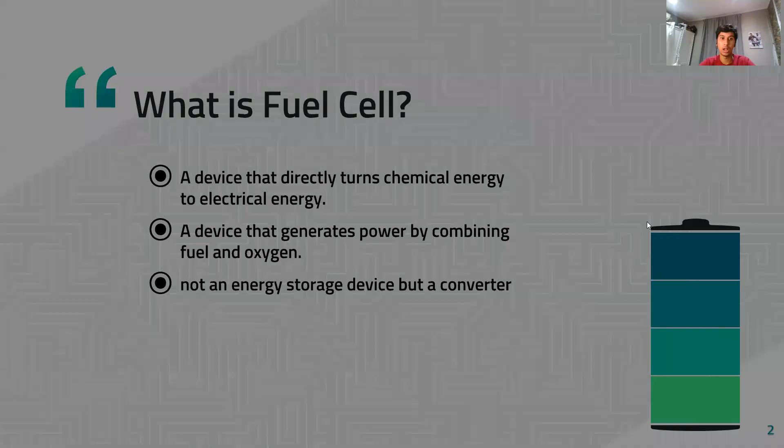Next, these are the classifications of a fuel cell. The first one is PAFC, or phosphoric acid fuel cell. It has a capacity of 50 kilowatts to 11 megawatts.

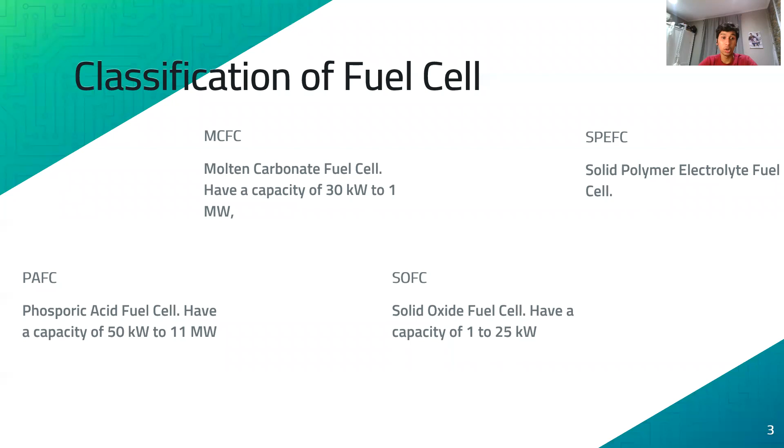Second is MCFC, or molten carbonate fuel cell. It has a capacity of 30 kilowatts to 1 megawatt.

The third one is SOFC, or solid oxide fuel cell. It has a capacity of 1 to 25 kilowatts. And last but not least is SPEFC, or solid polymer electrolyte fuel cell.

Due to its high electric efficiency and its current temperature-specific incompatibility for mobility, the most promising fuel cell for power systems is the SOFC.

The advantages of SOFC in the field of power generation is its high temperature waste heat production, which could be integrated in current cogeneration systems.

Thus, it significantly raises the efficiency of the system.

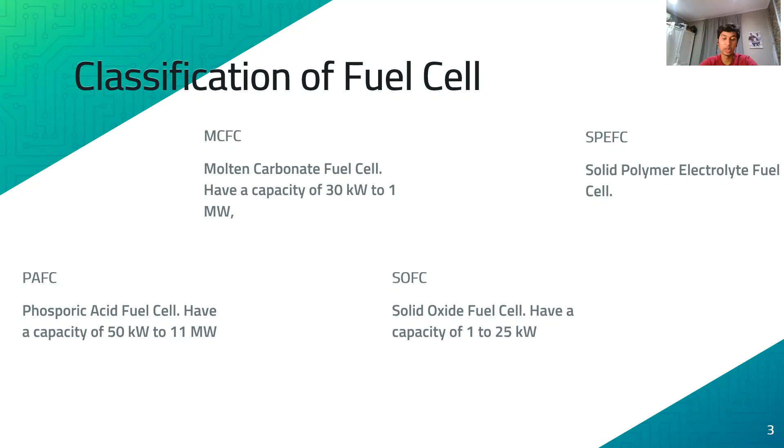Okay, this is how a fuel cell works. Inside a fuel cell, hydrogen together with oxygen or air is converted to steam.

For these two electrodes, the anode and cathode are set into an electrolyte. During the process, an electrochemical reaction takes place.

Compared to thermal engines, fuel cells have the advantage of a direct conversion of chemical energy into electrical energy. Thermal engines have to convert the chemical energy into thermal and mechanical energy by the combustion of fuel.

Mechanical energy is then used to operate a generator, while the thermal energy remains unused in many applications.

Consequently, the theoretical efficiency of a fuel cell is much better compared to thermal engines, as the theoretical achievable useful work is much better, and it's limited solely to the free enthalpy of chemical reactions and can therefore be higher than the coupling of a thermal engine.

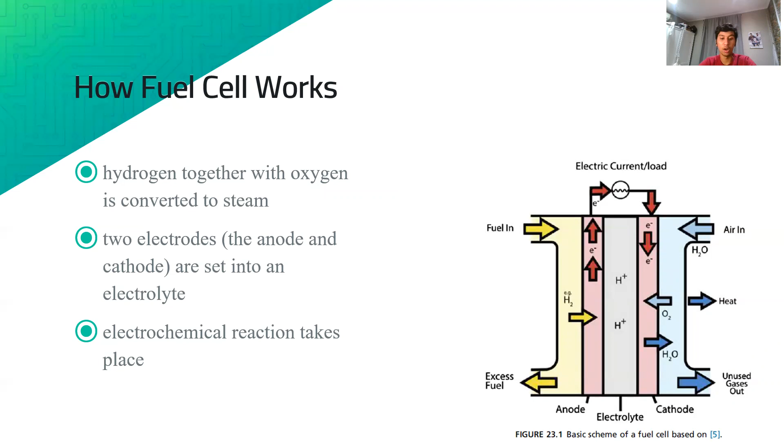These are some of the advantages and disadvantages of fuel cells. The first advantage is fuel cells are direct conversion of chemical energy into electrical energy.

Then, the theoretical efficiency of a fuel cell is much better compared to thermal engines, and the storage density of the chemical fuel is very good.

And these are the disadvantages. The first one is hydrogen is difficult to store and is currently expensive when produced from renewables. Also, investment costs for fuel cells are relatively high compared to batteries and thermal engines.

These disadvantages are why fuel cells are not quite popular in our country of Indonesia, and hopefully, maybe in the near future, it gets better.

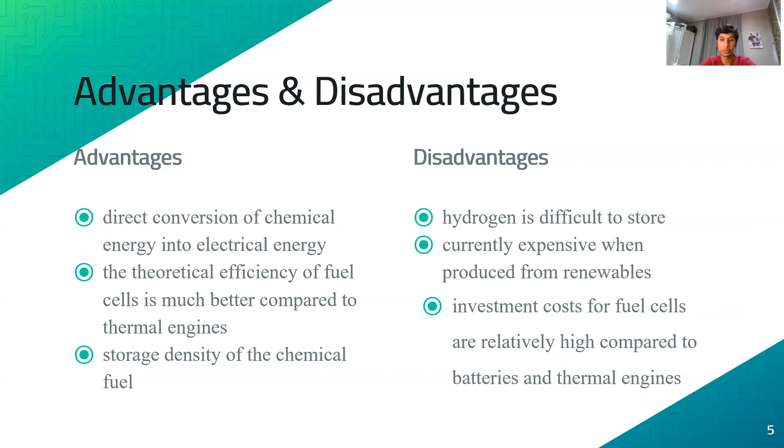Okay, these are the two main areas of fuel cell technology. The first one is fuel cell vehicles, which I'm going to go in depth next. And the second one is power technologies, such as combined cycle power plants, cogeneration, and residential generation.

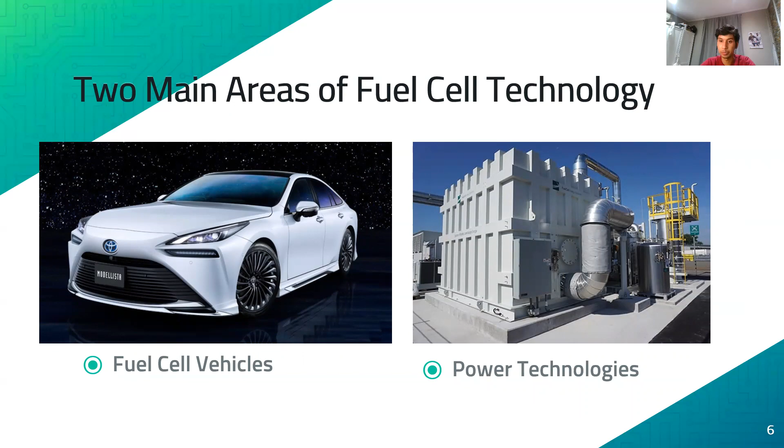Okay, these are some of the fuel cell vehicles. The first one is a car, that is the Honda Clarity produced by Honda. Next is a motorcycle produced by Yamaha.

And above there's an airplane made by Boeing. There's also a submarine here that uses fuel cells. This bus produced by Mercedes-Benz also uses fuel cells. The forklift produced by Toyota also uses fuel cells.

This train also uses fuel cell as power. And lastly, this boat also uses fuel cell as a source of power. As you can see, fuel cell vehicles are not only about cars, but many other vehicles use fuel cells.

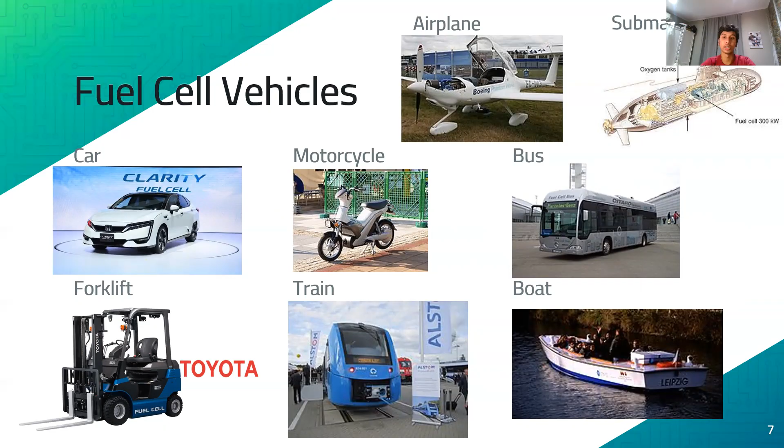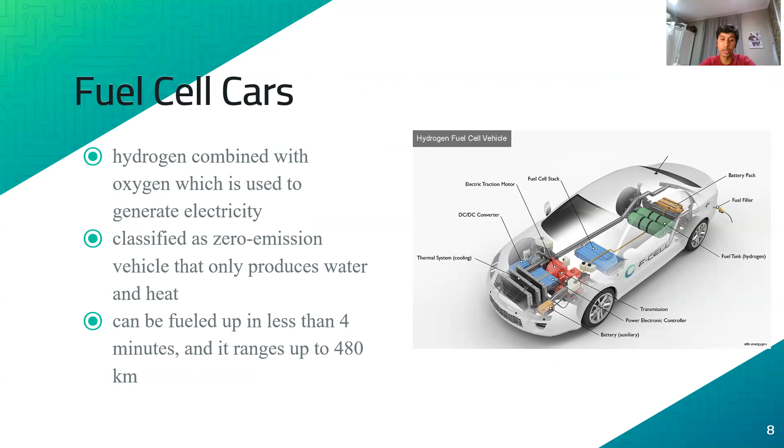It is classified as a zero emission vehicle that only produces water and heat, and it can be fueled in less than 4 minutes, and it ranges up to 480 kilometers.

These are the history of fuel cell cars. This picture right here is the Honda FCX V4. This is the first fuel cell car to be approved on American roads. It was produced in 2002.

It costs around $11,500. It's ranging around 260 to 310 kilometers, and it is produced until 2007.

And down below, you can see the list of fuel cell cars produced from 2002 to 2018. The Ford Focus, Nissan X-Trail, Mercedes-Benz, Chevrolet Equinox, and Hyundai Tucson. These five cars are no longer produced right now.

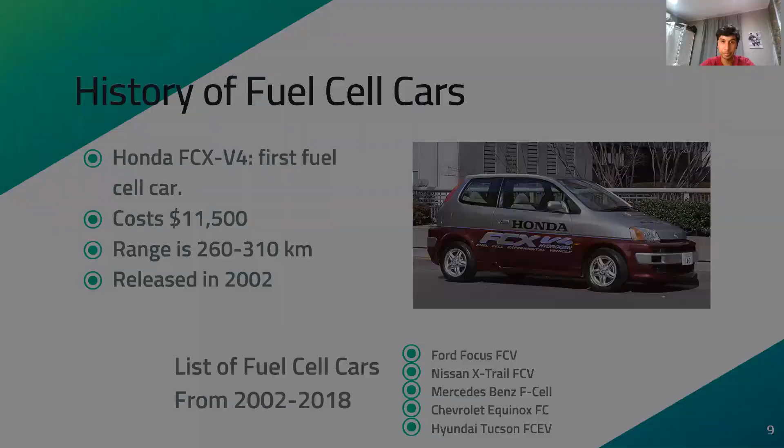Okay, and these are three cars still in production right now. The first one is the Toyota Mirai, this is the 2021 version. The Honda Clarity, this is also the 2021 version. And the Hyundai Nexo.

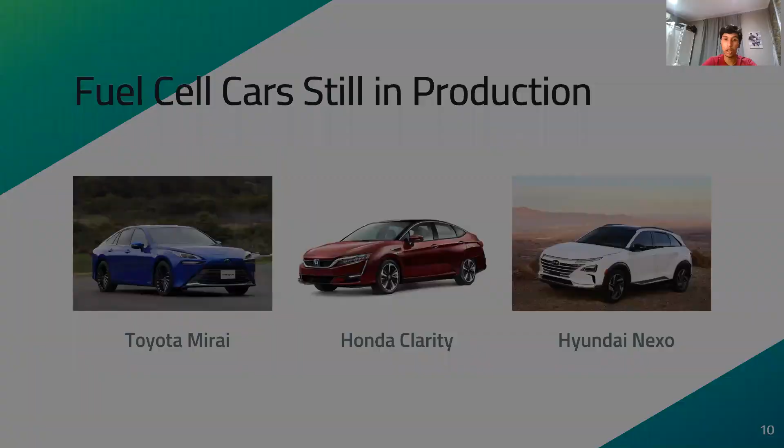Yes, these are the specifications of the fuel cell cars still in production. The Toyota Mirai has a range of 502 kilometers. It has a power of 182 horsepower with a torque of 300 Newton meters. It costs around

$58,500. The Honda Clarity has less range at 480 kilometers. It also has less power at 138 horsepower and 299 Newton meters of torque.

And it costs similarly to the Toyota Mirai, around the $58,500 region. And last is the Hyundai Nexo.

It ranges 600 kilometers and its power is 163 horsepower with a torque of 394 Newton meters. The Hyundai Nexo is cheaper than the other two options.

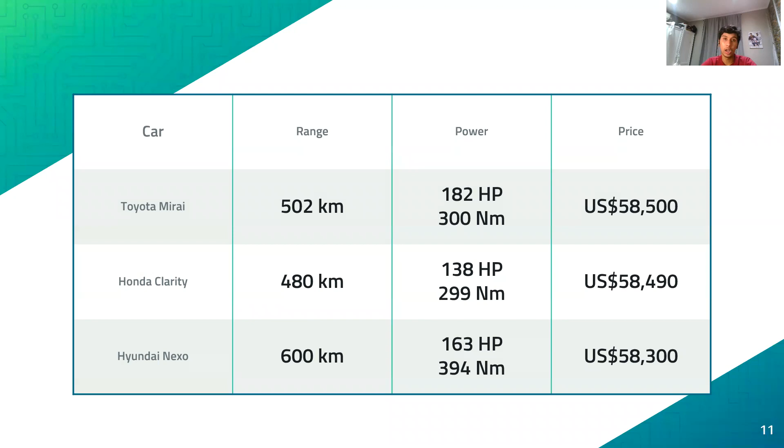I think that is all from me. Thank you very much for listening to my presentation. I hope for the future, fuel cell technology, especially fuel cell cars, can be used more in our country. And I will be looking forward towards it. Thank you very much.